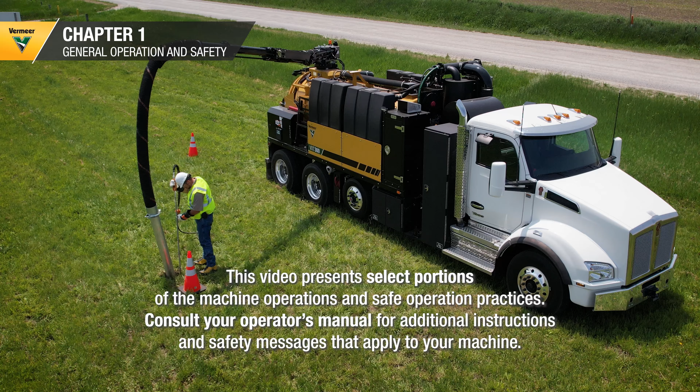This video presents select operating and safety procedures for the Vermeer VXT300 vacuum excavator. The components and controls on your machine may look different from those in this video. However, most operating functions are the same.

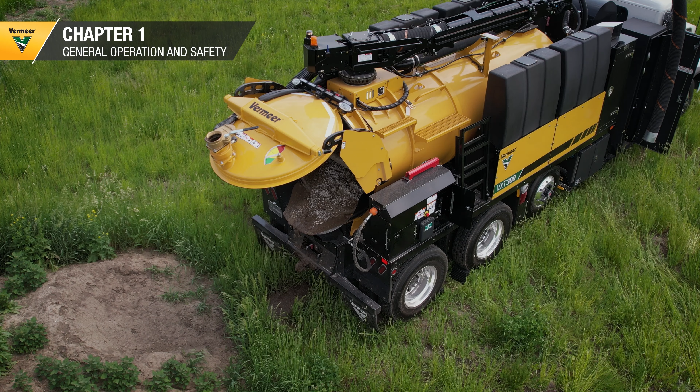Your Vermeer vacuum excavator truck is equipped with useful safety features. However, safe work practices are also necessary for accident prevention. Improper use of the machine could result in death or serious injury.

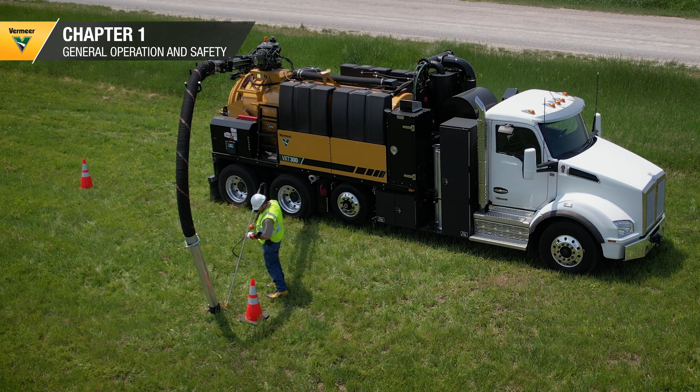This video is a supplement to the machine's manuals and does not contain all the instructions needed to properly operate your machine. Vermeer supplies every machine with 2 operator's manuals. One is in the resource library shipped with your machine. The other is in the black storage box on the machine, so it is always close.

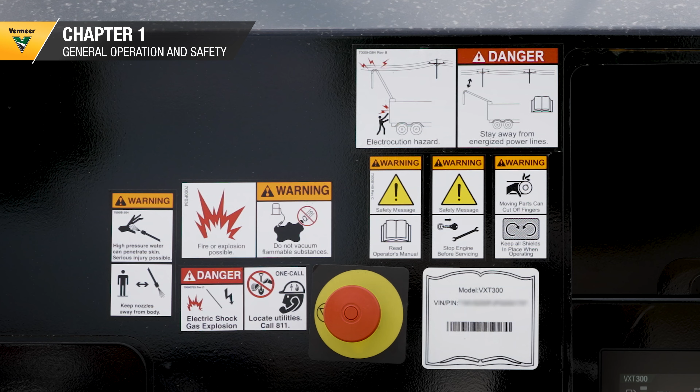Before operating, all operators must thoroughly read and understand the operator's and maintenance manuals, safety instructions, and safety signs on the machine. While watching this video, stop and review the information at any time and consult your operator's manual to reinforce what you have learned.

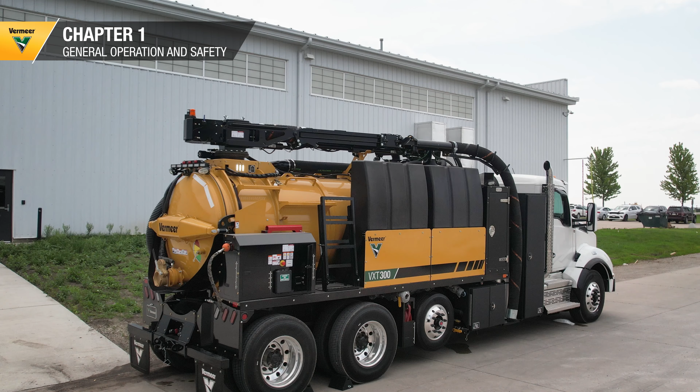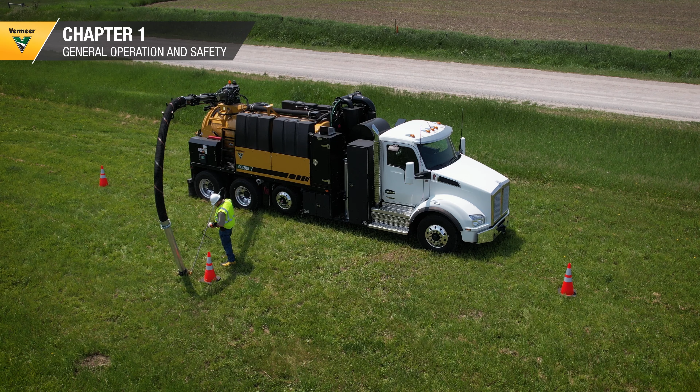Allow only responsible, properly trained people to operate a vacuum excavator. Learn the controls, operation, and use of the machine under the supervision of a trained and experienced operator. All operators must be familiar with job site safety rules and regulations and must be mentally and physically capable of safely operating the machine.

Consult your operator's manual for required personal protective equipment. Wear close-fitting clothes and confine long hair. Remove jewelry such as rings, watches, necklaces, or bracelets. Always wear a hard hat, wrap-around safety glasses or goggles, and hearing protection. Contact your local environmental specialist to determine the required level of hearing protection for your job site.

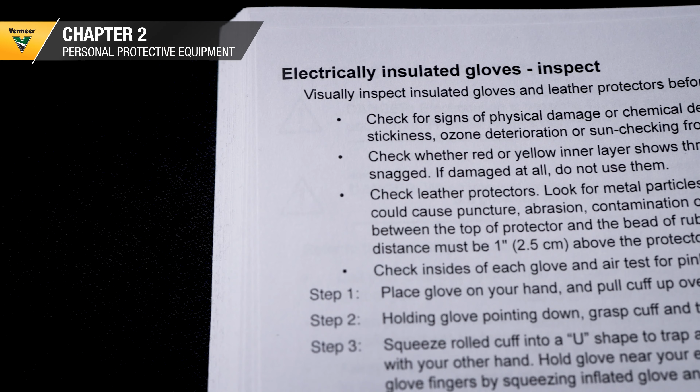When operating near energized electric lines or underground utilities, always wear electrically insulated boots and gloves. Visually inspect your insulated boots and gloves before each use. See your operator's manual for proper inspection steps and care.

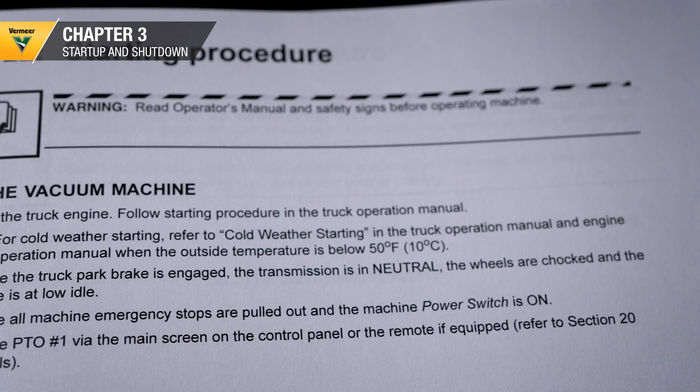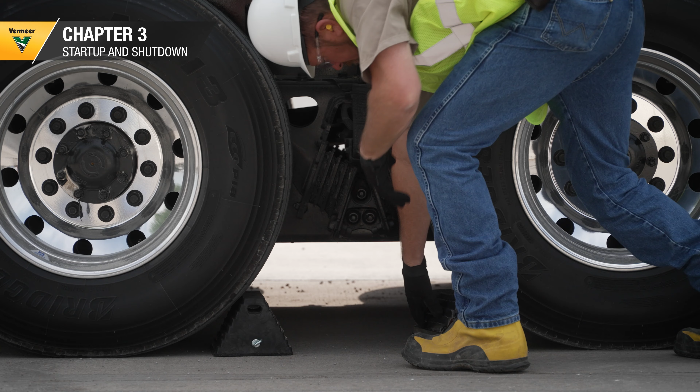When starting the machine, always follow the complete starting procedure as instructed in your operator's manual. Start the truck engine. Then verify the park brake is engaged and the transmission is in neutral. Chock the wheels and verify the engine is in low idle. Verify all machine emergency stops are pulled out and turn the machine power switch to on. Engage PTO number 1 via the main screen on the control panel or the remote if equipped.

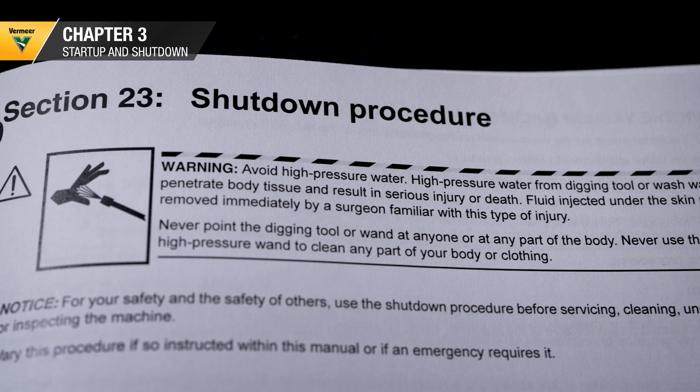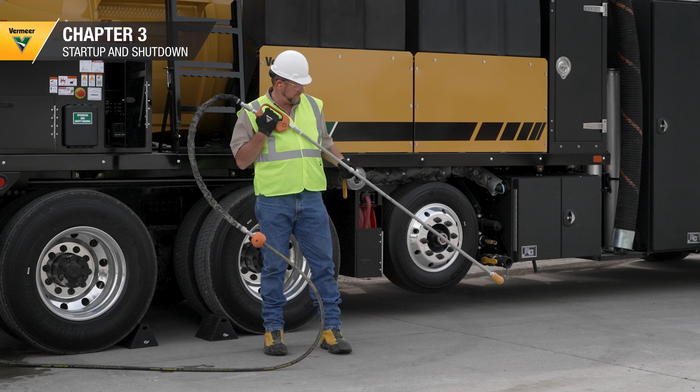When shutting down the machine, always follow the complete shutdown procedure as instructed in your operator's manual. To shut down the machine, shut off the water pump via the main screen on the control panel or the remote if equipped. Pull the trigger on the water attachment to relieve pressure. Make sure all functions are off and the truck engine speed is at low idle. Disengage PTO number 1 via the main screen on the control panel or the remote. Shut off the truck engine according to the instructions in the truck operator's manual. Failure to follow the shutdown procedure before you work on the machine can result in unexpected hazards.

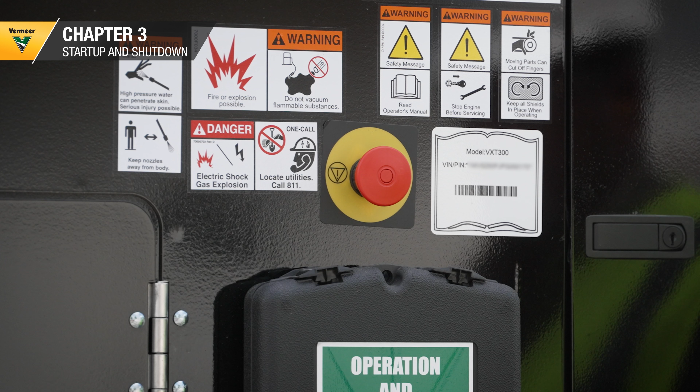In the case of an emergency, use the emergency stop buttons. The emergency stop buttons are located on the right and left sides of the machine. If using a remote control, press the machine stop button.

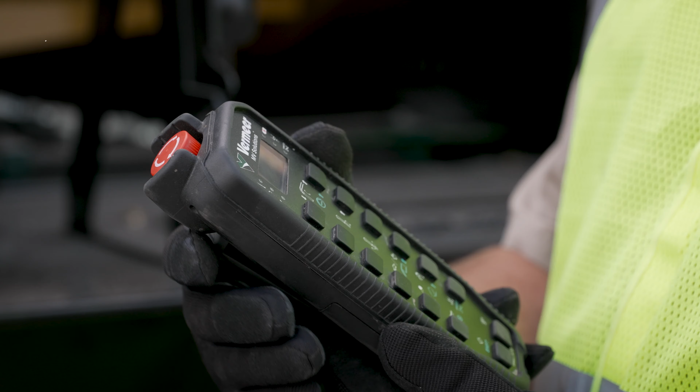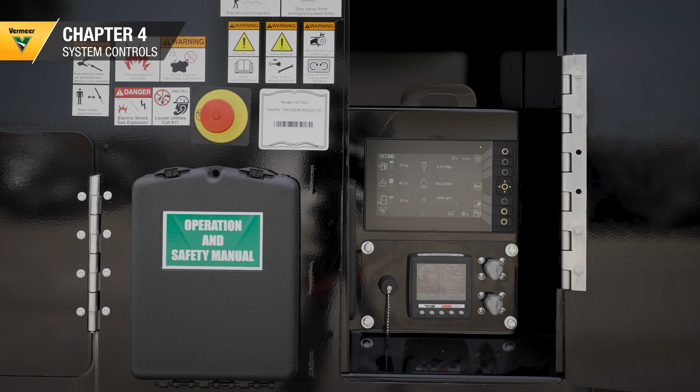Before going over machine operations, we will review the system controls, including the main control panel, display screens and navigation, and alert handling. The main control panel includes the main display, machine emergency stop or e-stop buttons, and the air compressor display if equipped. The main display screen shows the system operational status and machine functions.

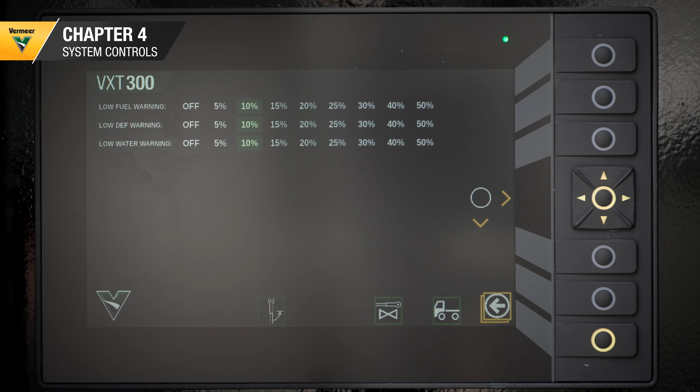There are 2 primary screens and 9 subscreens that enable system operation, toggle machine functions, and provide onboard diagnostics. See your operator's manual for the list of available screens.

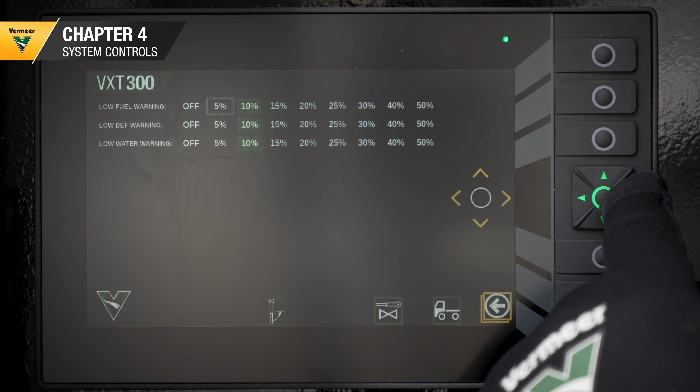Use the soft keys and navigation pad to actuate system functions, toggle a change in machine function state, and navigate the display screen. If an input is available, the corresponding soft key and/or navigation pad will be backlit.

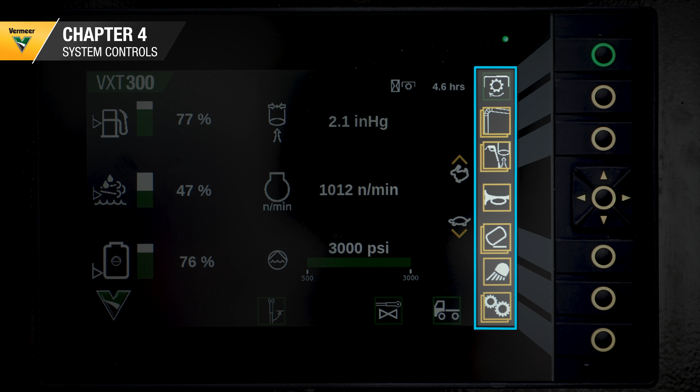The system's functions on the right side of the screen have color-coded borders. Green indicates available and active. Yellow indicates available but inactive. Red indicates that the function is both unavailable and inactive. A double border indicates that activating the adjacent soft key will access additional screens.

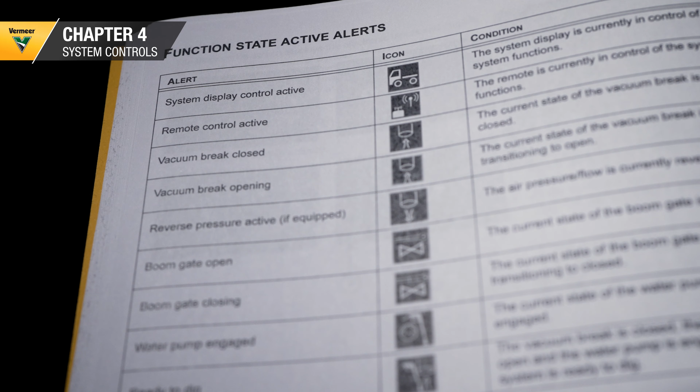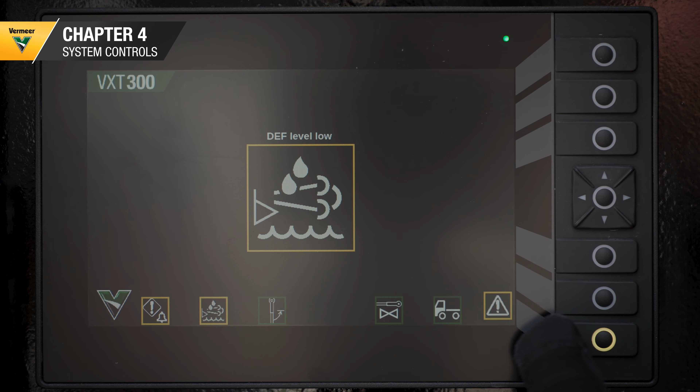During machine operation, conditions that may reduce system functions trigger full-screen derate or shutdown alerts. After evaluating an alert based on the information provided in your operator's manual, the operator must acknowledge the alert before excavation can resume. To do so, press the bottom right soft key.

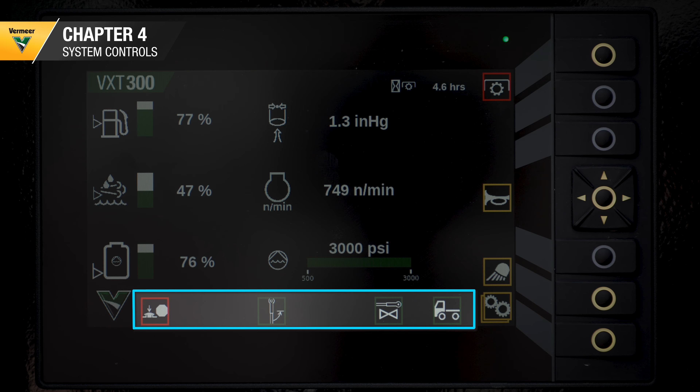There is an alert ribbon which appears along the bottom of every screen. The icons in this ribbon communicate the state of various machine functions and components, as well as active alerts. The borders of the alert ribbon icons are also color-coded. The significance of those colors may vary, so carefully review and understand the full list of function state, derate, and shutdown alerts in your operator's manual.

After 5 minutes of display inactivity, the screensaver will activate and the bottom soft key backlight will pulse green. Press the soft key to reactivate the screen.

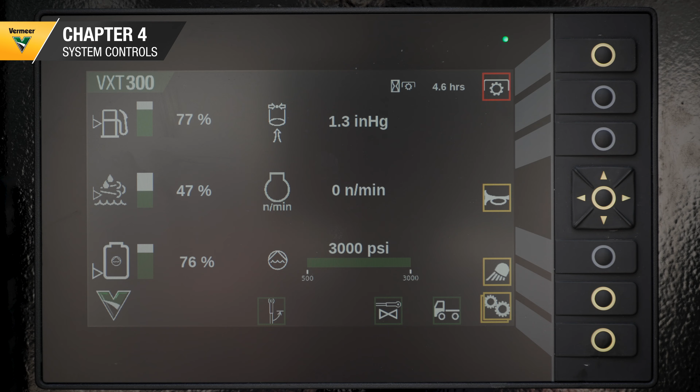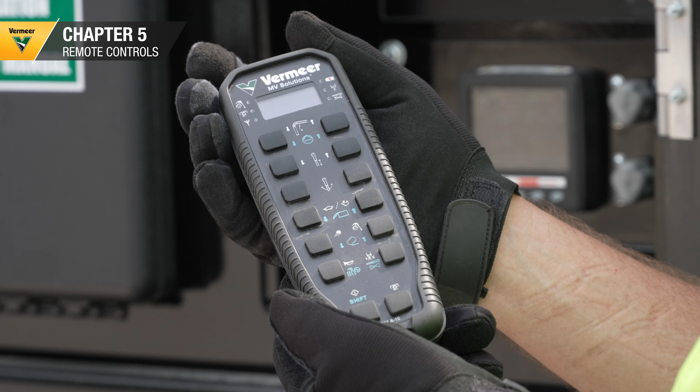For the purposes of this video, we will demonstrate remote functions using a RocketFlex remote. The remote control equipped with your machine may look different, but all functions are the same.

Normal operating range is within 25 feet of the machine. Check the range before you operate, and do not exceed the maximum recommended range. See your operator's manual for information about the remote storage location, pairing instructions, controls operation, charging, and other remote functions.

Prior to excavating, you must prepare the job site and know the estimated location of underground utilities. If a utility cannot be precisely located, it must be shut off by the utility company. Striking an electrical line can cause electrocution. Striking a gas line can cause an explosion. Cutting fiber optic cable could result in eye damage by laser light. Death or serious injury is possible.

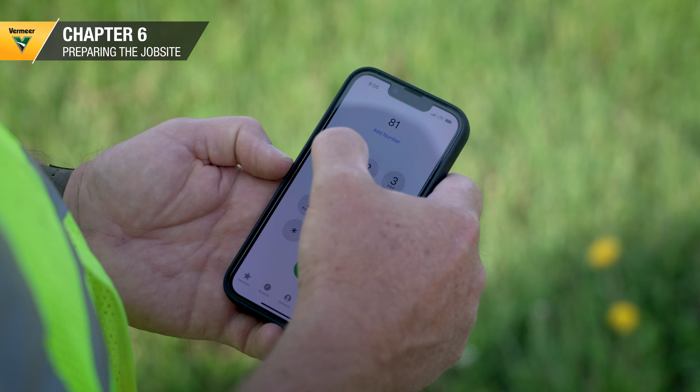Call the local one-call system and any utility company that does not subscribe to the one-call system. For areas not represented by One Call Systems International, contact the appropriate utility companies or national regulating authority to locate and mark underground installations. Contact the local site manager if private utilities may be present.

Check for adequate overhead and side clearances, making sure to account for the height of the boom. Depending on roadway regulations or corporate policies, secure proper traffic control.

Before transporting, make sure the machine is free of soil, loose material, or debris. Check that all machine components and tooling are stored properly.

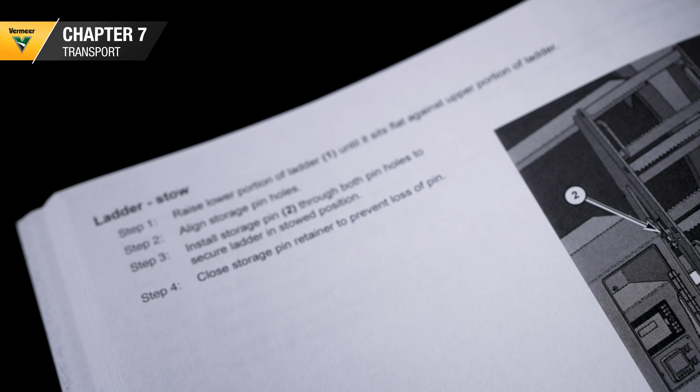Stow the ladder to transport. See your operator's manual for instructions. Make sure the spoil tank is all the way down on the rest and the door is securely closed. Make sure the boom is in the transport position. See your operator's manual for instructions to stow the boom.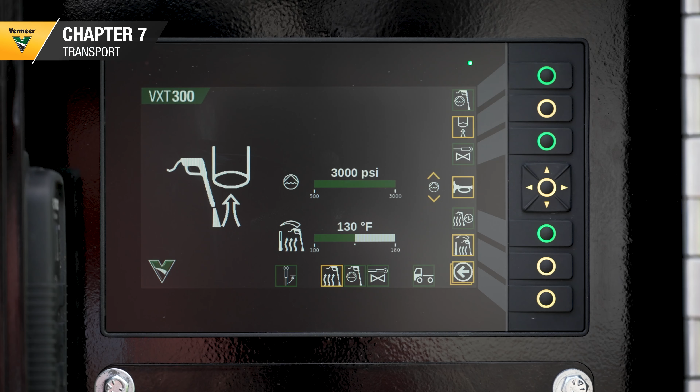If equipped, make sure the hot box is turned off. Check the condition and operation of the highway lights and brakes. Follow the shutdown procedure as instructed in your operator's manual. Refer to the truck operator's manual for truck inspection information.

Always survey the area around the machine for people or obstacles before moving the machine. When entering or exiting the cab, remember that improper use of the steps, ladders, and platforms can cause you to fall. Keep them clear of objects and debris.

Face the machine when mounting and dismounting and maintain 3 points of contact with the access system. Keep all handrails in place.

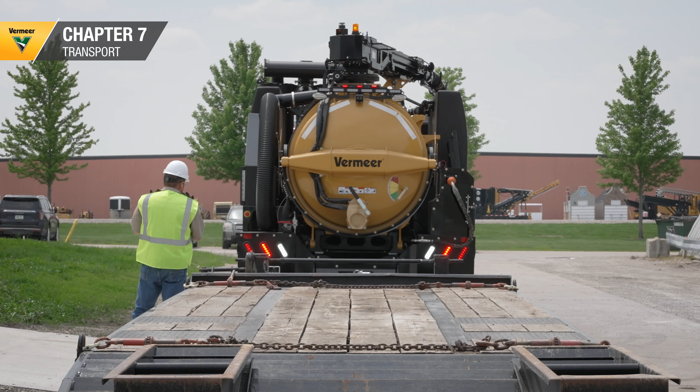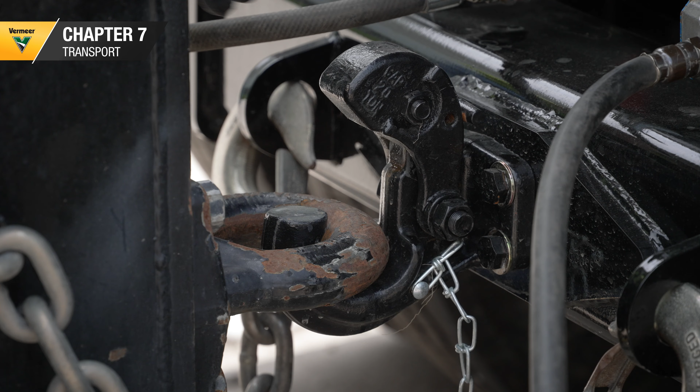Adhere to all rules and regulations in the Commercial Driver's License Manual regarding trailer inspection, hookup, and towing. Use good judgment and obey all applicable laws governing road use. Know the locations and purposes of the following: the pintle hitch, the air brake glad hand connections.

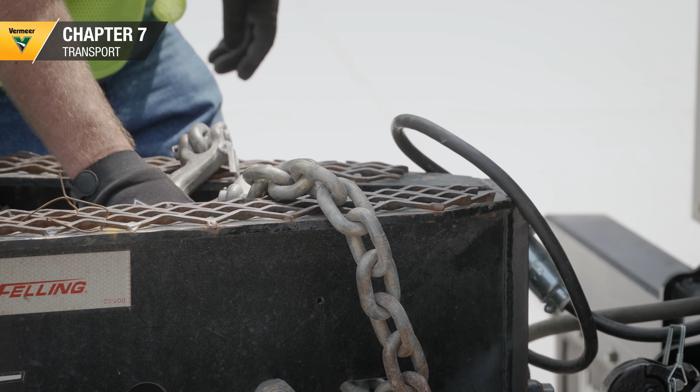Always install glad hand covers when glad hands are not in use. The trailer chain D-rings. Always use DOT-compliant chains while towing. A 7-pin round electric plug.

The standard plug installed on Vermeer VXT models will only operate a trailer equipped with air brakes. For an electric brake trailer, a DOT-compliant electric brake controller and electric plug must be properly installed. Always verify the trailer lights and brakes are functional before towing.

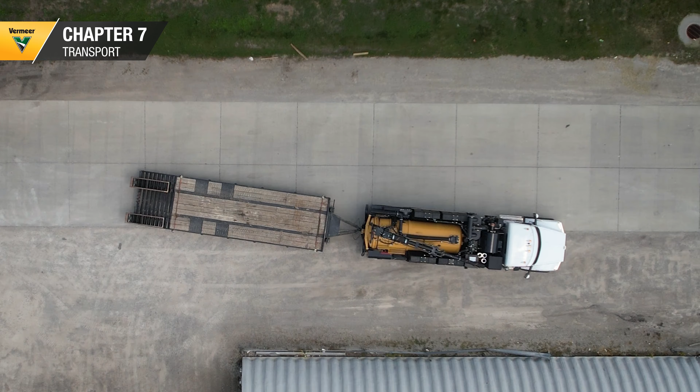The truck is equipped with a tow hitch that you should only use in compliance with local and federal regulations. Towing a loaded trailer while hauling spoil will likely place the total combination in an overweight situation. See your operator's manual for information to maximize the towing capacity, and refer to local and federal regulations for legal towing capacities based on the number of axles and axle placement.

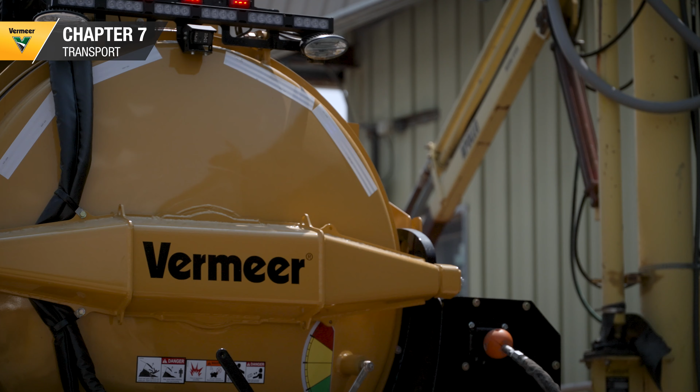Weigh the combined truck and trailer at a local certified scale for compliance with local and federal regulations.

Remember to keep the boom away from overhead utilities and use caution when operating the boom. Death or serious injury will result if the boom approaches or touches energized overhead electrical power lines.

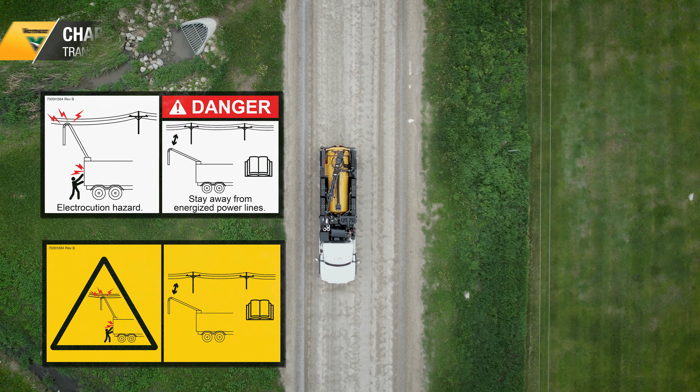Position the machine on stable, level ground as close to the area to be excavated as possible. Engage the truck park brake and chock the wheels.

The weight of your machine may cause the ground to give way. The machine can fall into the excavation or tip over, causing death or serious injury. Keep well away from the edges of the embankment or excavation. Do not work in a trench with unstable sides which could cave in.

Specific requirements for shoring or sloping trench walls are available from several sources, including federal and state OSHA offices. Contact the suitable authorities for these requirements before working in the trench.

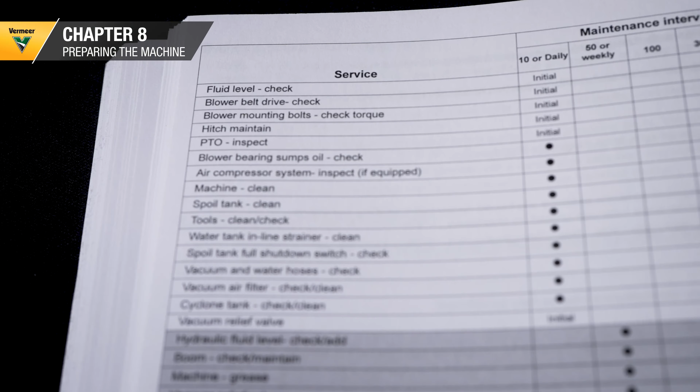Always perform a visual inspection of the machine before you operate. The machine must be in good operating condition with all safety equipment installed. See your operators, maintenance, and parts manuals for machine inspections, recommended intervals, and procedures.

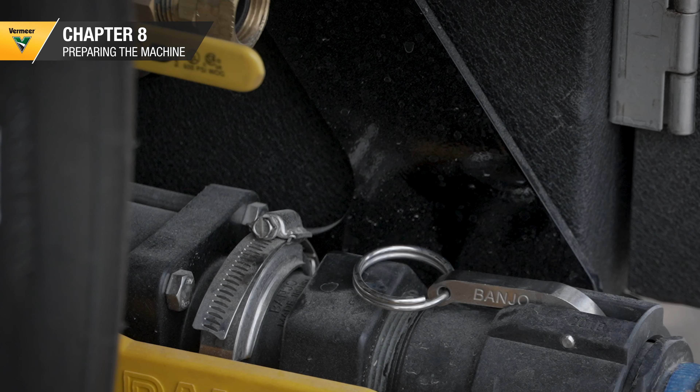Fill the freshwater tanks with clean water. The main screen and water level lights show the water fill percentage. Make sure to relieve water from the air gap tube to protect against freezing in cold weather conditions.

Clean the water strainer daily before you start the machine or during operation if the water flow becomes restricted. Refer to your operator's manual for the cleaning steps.

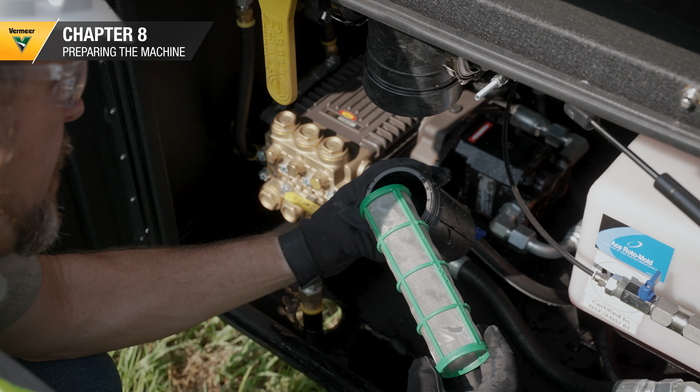Before operating, refer again to the Safety Messages section in your operator's manual for important safety information. Read and understand all safety and operating instructions.

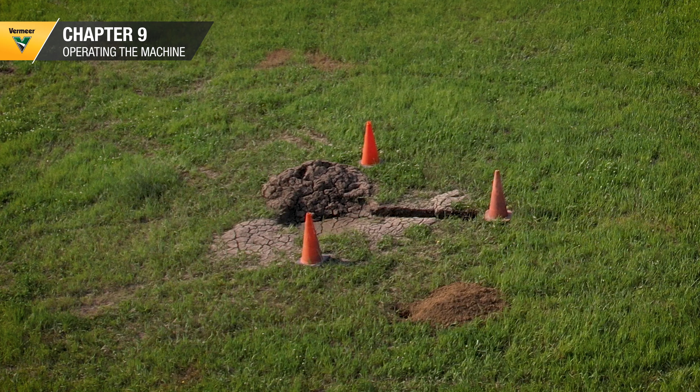When you arrive at the job site, visually check for notices of underground placements, manhole covers, drop boxes, and recent trenching activity. If operating along a road, properly warn and divert motor vehicle and pedestrian traffic. Use all necessary signs, traffic cones, and flag persons needed for the work situation.

3 safety cones are provided under the left-hand water tanks. Set up the safety cones around the machine before you operate.

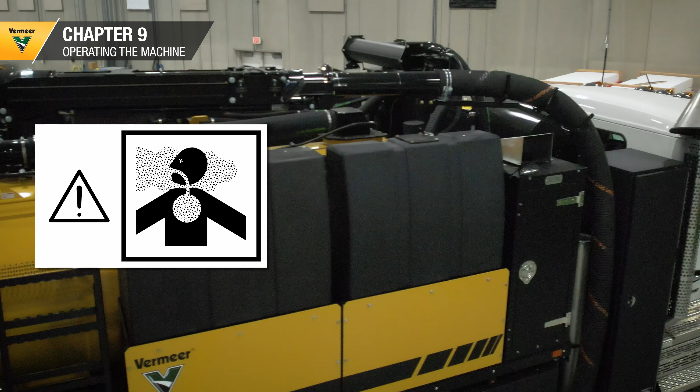Remember that engine exhaust can asphyxiate or poison, resulting in death or serious injury. Operate the machine outdoors. If it is necessary to operate the engine in an enclosed area, properly vent the exhaust gases. Make sure you are wearing the proper personal protective equipment.

Striking an electrical line with a vacuum excavation tool, lance, or wand can result in electrocution. Death or serious injury could result if you are not wearing electrically insulated gloves.

Before operating, remember that if a strike occurs, release the digging tool. Do not touch any part of the vacuum or excavation system. Have someone who is clear of the area contact the utility company to shut off electrical power. Do not allow anyone to approach the machine.

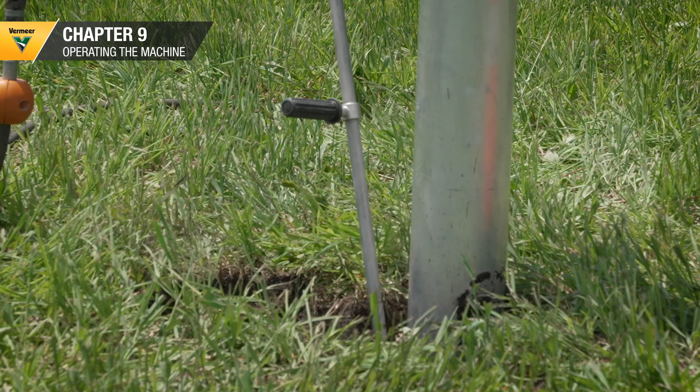Some breakers automatically reset. Do not assume power has been permanently disconnected until you confirm that the utility company has locked out power to that line.

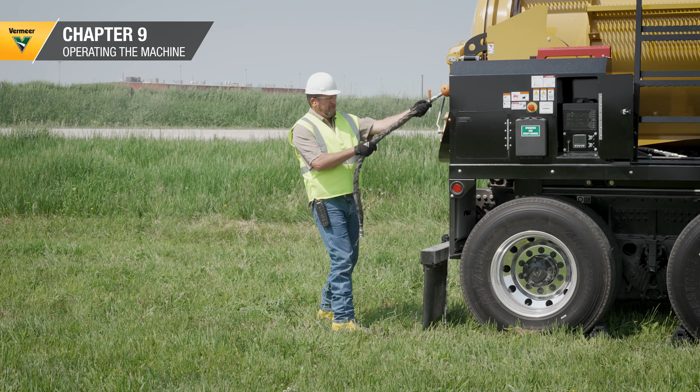To begin operation, unreel the necessary amount of high-pressure water hose from the hose reel. Attach the dig wand to the hose with the quick connect fittings.

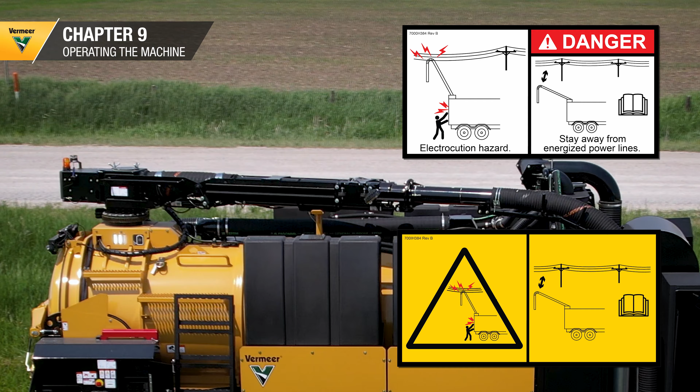Remember, the boom will swing outside the normal height and width of the machine. Death or serious injury will result if the boom approaches or touches energized overhead electrical power lines. Keep the boom away from overhead utilities and use caution when operating. Make sure obstructions such as electrical lines and/or approaching traffic are clear of the boom movement.

To position the boom, use the control panel or remote to raise the boom high enough for the boom hose to clear the stow plate.

Rotate the boom clockwise away from the rest. Position the boom so the end of the boom hose is about 5 feet above the ground to provide space to attach the dig tube.

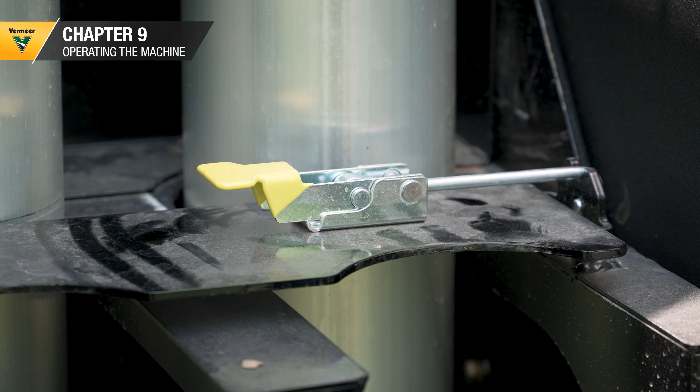Unstrap and remove the outer tubes as needed. If the inner tubes also need removed, open the cam latch and raise the retaining plate.

Verify the PTO is shut off. Then check that all hoses, fittings, and nozzles are clear of blockages and free of damage. Clean and replace as needed.

Attach the dig tube using the ring clamp. Add dig tube extension tubes as needed.

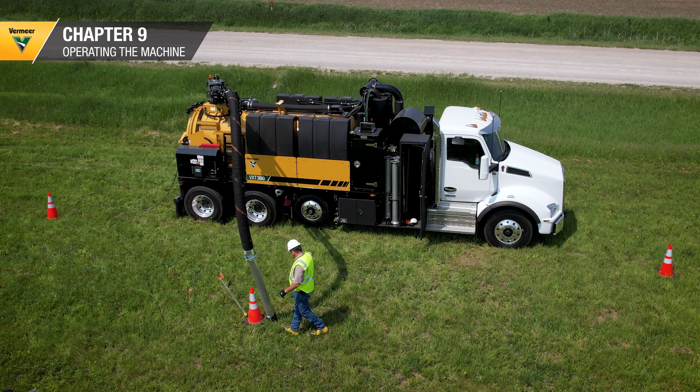Position the vacuum tube above the desired digging location. Open the water supply valve and hose reel water supply valve, and confirm the water antifreeze 3-way valve is in the water position.

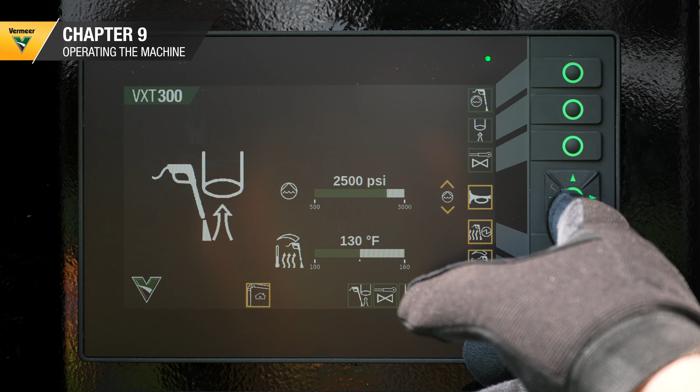Close the vacuum brake. Turn the water pump on and select the desired water pressure and temperature. If equipped, this is when it would be appropriate to turn on the water heater or hot box.

Remember to avoid high-pressure water contact with your body or skin. The high-pressure water from the digging tool or wash wand can penetrate skin and body tissue and result in death or serious injury. Keep the nozzles away from the body. Fluid injected under the skin must be removed immediately by a surgeon familiar with this type of injury.

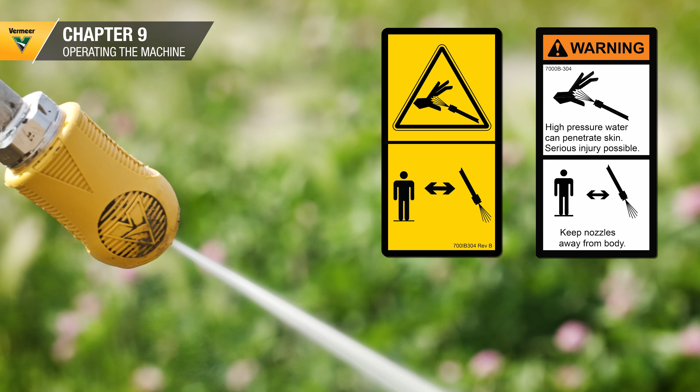Never point the digging tool or wand at anyone or at any part of the body. Never use the high-pressure wand to clean any part of your body or clothing. When excavating, keep all spectators away.

Point the dig wand at the excavation area and pull the dig wand lever to supply high-pressure water to excavate the ground.

Move the dig wand in a circular motion so the rotary nozzle excavates the soil. Place the vacuum tube over the material to remove it from the hole.

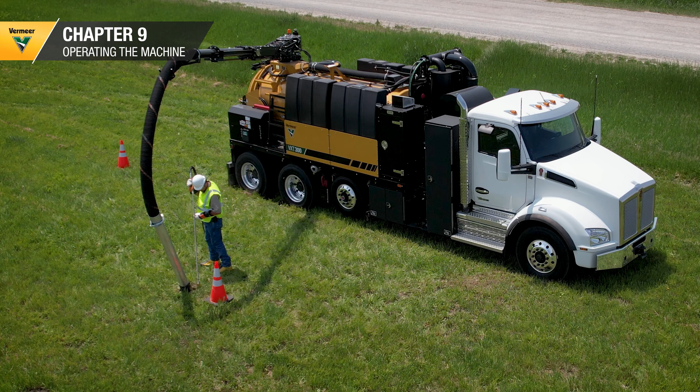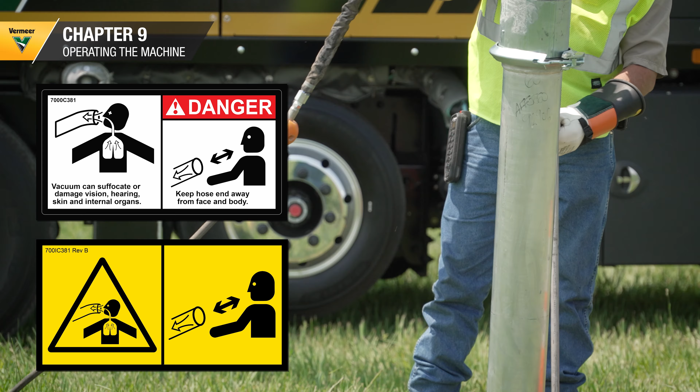During vacuum excavation, the vacuum tool uses a powerful airstream to remove wet or dry material. Vacuum hoses pose a suffocation hazard and will cause death or serious injury. Keep the hoses and tools away from the face and body. Make sure to use the proper rotary nozzle and pressure for excavation to prevent underground utility damage.

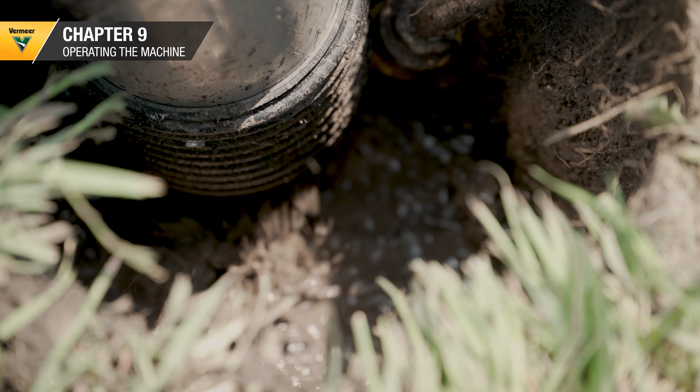As the digging tool descends, occasionally release the wand trigger and remove the wand to check the hole. If you encounter resistance, remove the tool, identify the utility or obstruction, and remove it according to your manual guidelines. Continue digging, occasionally stopping to check the hole until the utility is located.

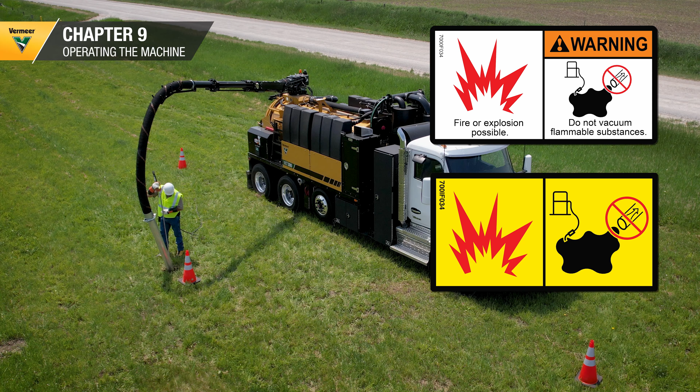Remember, fire or explosion can cause death or serious injury. Do not vacuum hazardous or flammable material. Consult federal, state, and local regulations regarding classifications of hazardous material.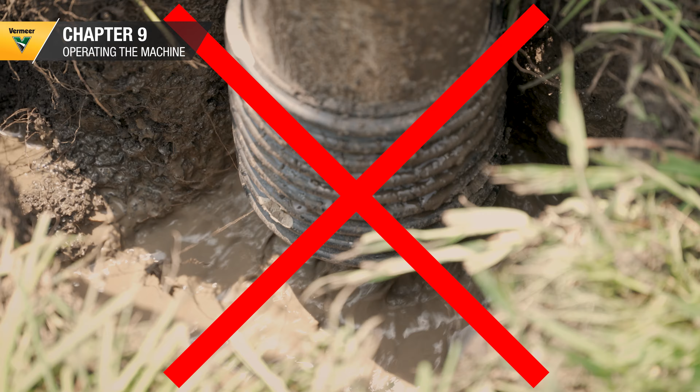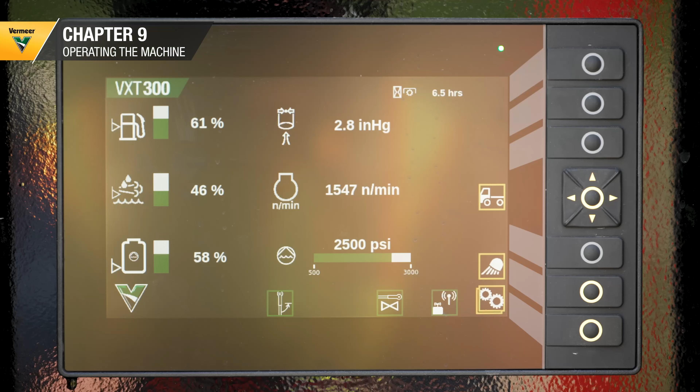When vacuuming liquids, do not completely submerge the vacuum tube in the fluid. Keep the tool partially out of the fluid to allow airflow through the vacuum tube so material moves more quickly to the spoil tank. When the spoil or fluid level in the spoil tank reaches capacity, the vac break opens to prevent overfilling. When this occurs, empty the spoil tank.

There are 2 ways that vacuum is broken. One is an electronic shutoff that derates and opens the vac break. The other is a secondary mechanical float ball that shuts off vacuum to the tank.

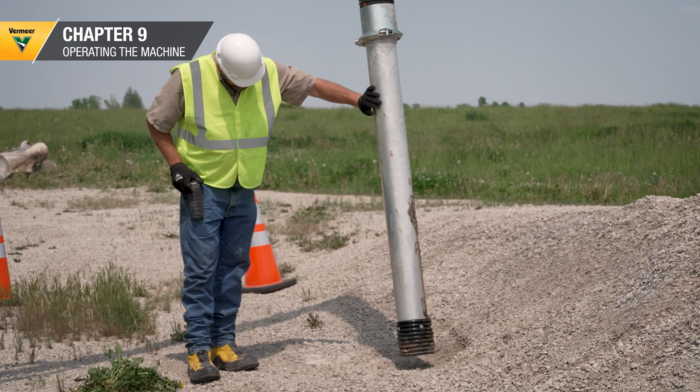When vacuuming dry materials, the tank full shutdown sensor does not function. Keep a close eye on the spoil tank when vacuuming dry material and refer to your operator's manual for instructions on checking the spoil tank level.

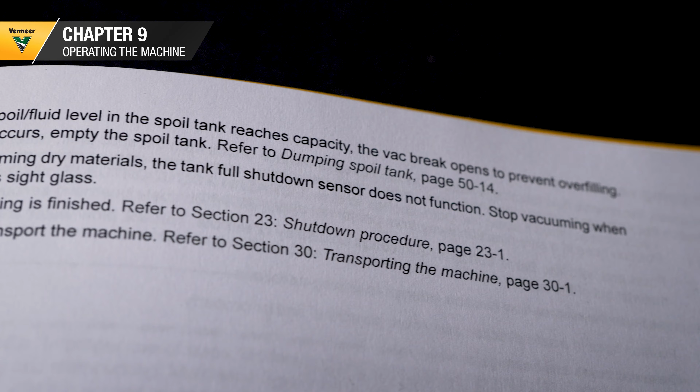If there is a boom obstruction, see your operator's manual for removal instructions. If you need to reposition or move the machine within the designated work zone, refer to the instructions in your operator's manual.

When you finish excavating, follow the shutdown procedure as instructed in your operator's manual.

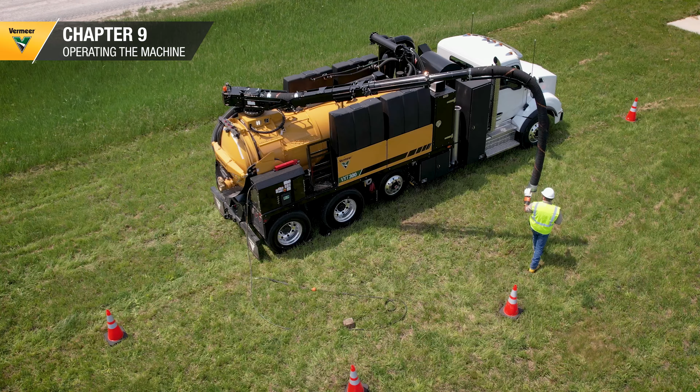Establish a plan and site for disposing materials in the spoil tank before you begin excavating. When you arrive at the disposal site, make sure all personnel are clear of the dumping area. To begin dumping spoil, position the machine relative to the dumping location.

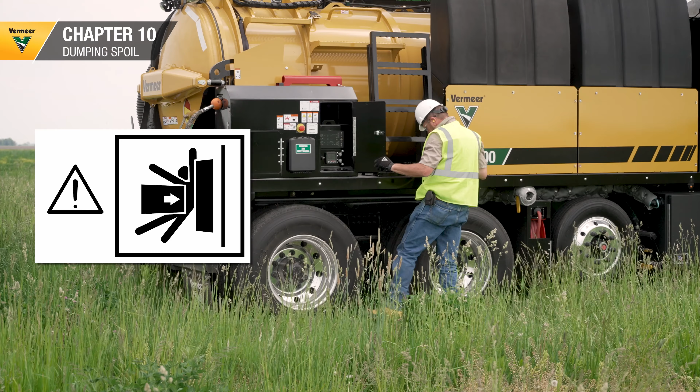Chock the tires and apply the parking brake. Rolling or tilting of the truck may cause death or serious injury.

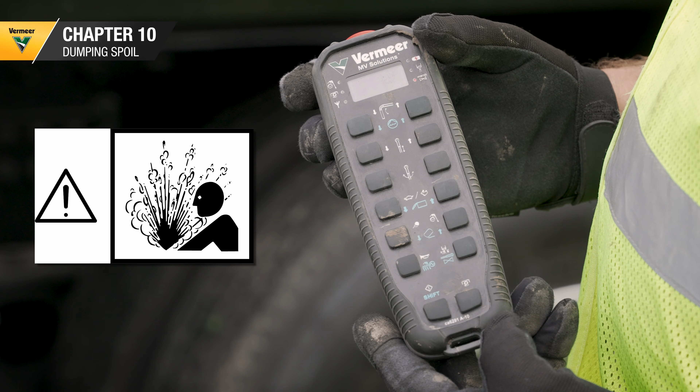Engage the PTO to open the vac break and boom gate in order to relieve tank pressure. Failure to do so will result in death or serious injury.

To provide clearance in preparation for raising the tank, lift the boom off the stow plate and rotate past the edge of the truck. Use the tank gate valve to initially drain the tank.

Next, you'll dump the remainder of the spoil. To dump the entire spoil tank, open the spoil tank door.

Remember, never allow anyone under a raised load unless the load is securely supported to prevent it from shifting or falling. Death or serious injury is possible if struck or crushed by a falling load.

Once the door is open, engage the hydraulic lockout to secure the door. Raise the spoil tank. Material in the spoil tank may be very heavy. Stay clear of the door when raising the tank.

Once the tank is empty and in the raised position, verify that the door locks are in place. Then, clean the tank according to your operator's manual.

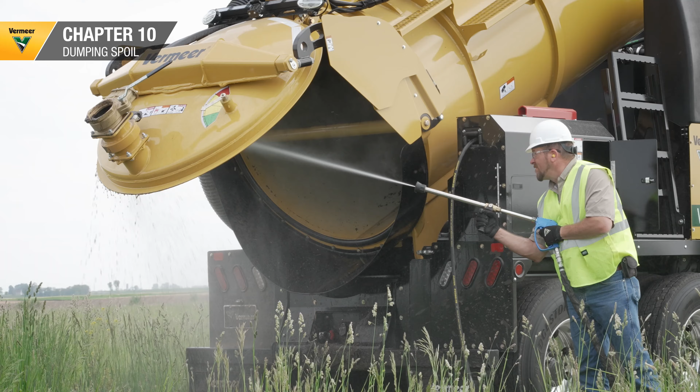When you finish cleaning the tank, make sure all personnel are clear of the spoil tank and door, and keep hands away from pinch points. A raised load can crush. Lower the tank.

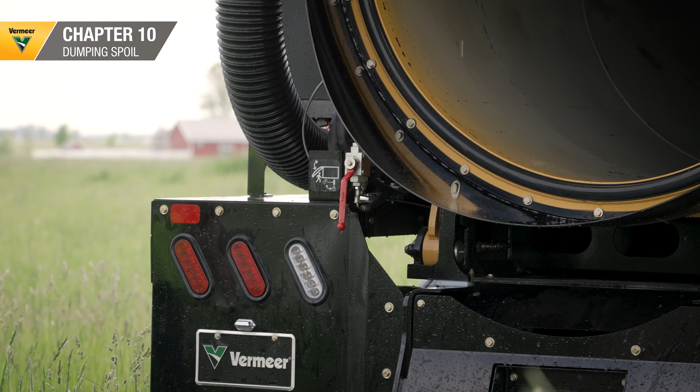Release the spoil tank door lock and close the spoil tank door.

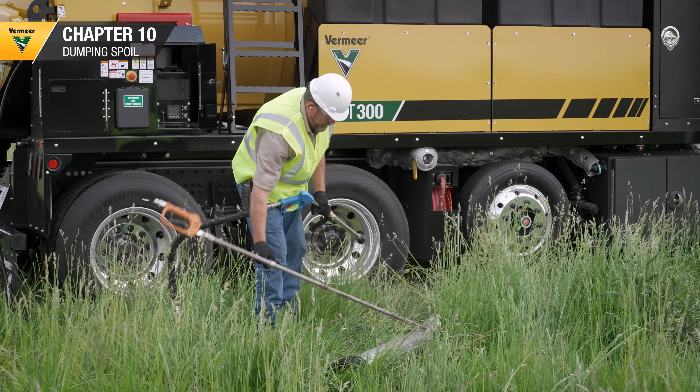Continue the cleaning process, referring to your operator's manual for instructions on how to clean the tools, hoses, and filtration system after each dump. Properly stow all tools and hoses.

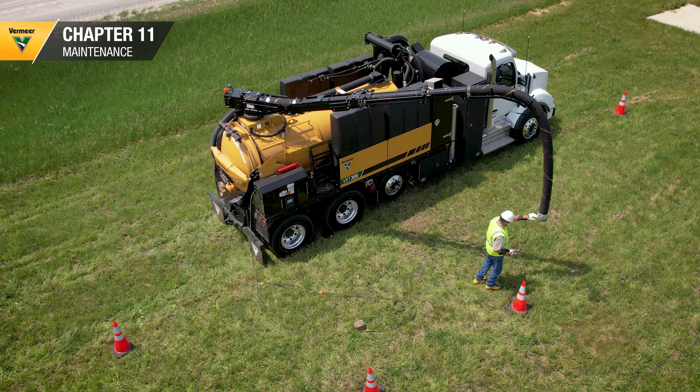Vermeer supplies every new vacuum excavator truck with an operator's manual that provides important operation and safety information. If you suspect something is wrong with the machine, stop use and contact your independent authorized Vermeer dealer. Do not take chances with your safety by continuing to use a machine that needs maintenance or repair.

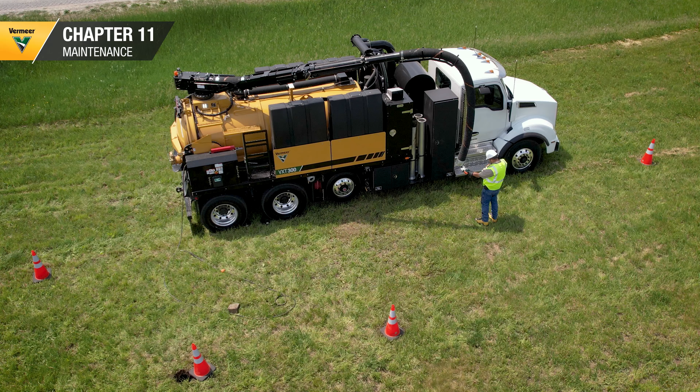Safe work practices are an important part of accident prevention. Do your part in following these procedures for your safety and the safety of others.